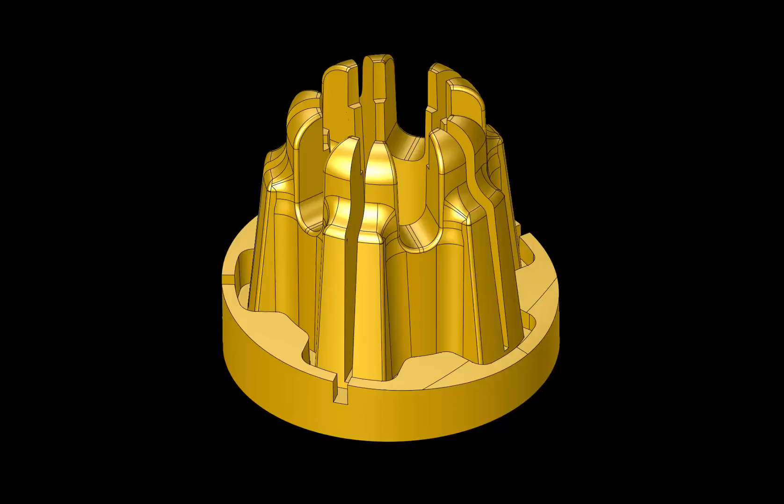The cooling process of a mold has a significant impact on its cycle time as well as on part warpage. Parts with complex shapes need curved cooling channels with constant distances from the edge for optimal cooling. Usually, these cannot be created using typical milling and drilling. Version 13 introduces a new function for designing conformal cooling inserts using 3D printing technology.

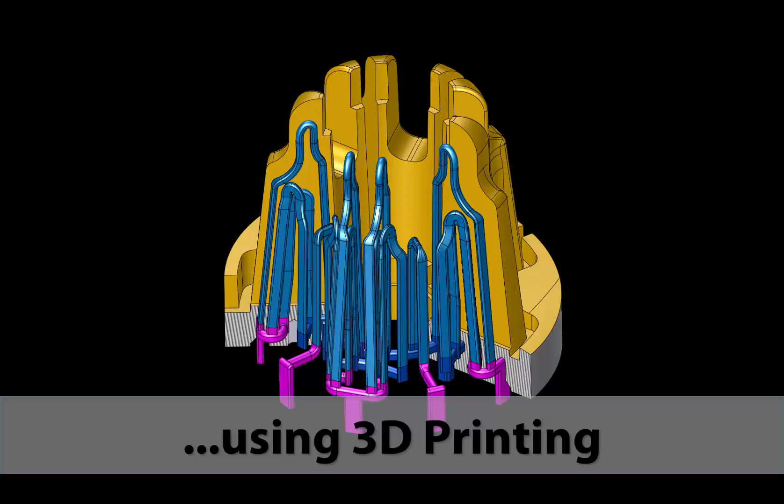The core insert of this part is already designed. We will now design the cooling channels of the orange segment. The orange segment is stiff and narrow, so first we will analyze it to determine the size of the cooling channels we want to use.

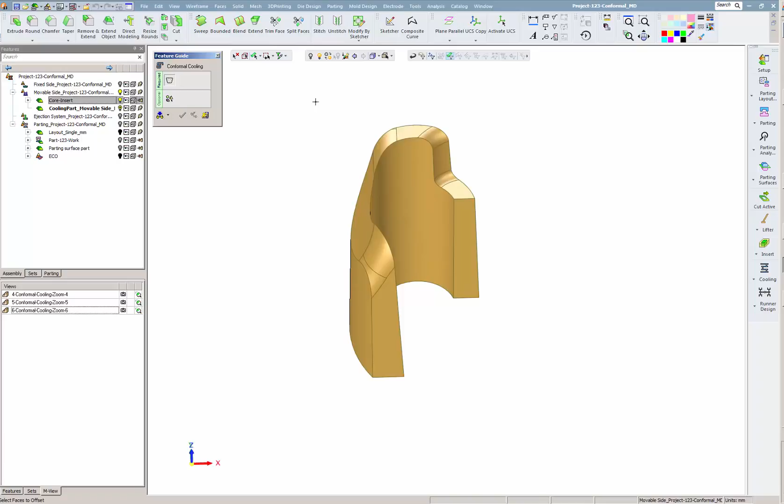Using the mesh offset option, we select the orange faces and define the cooling offset. The offset body is colored in yellow. We hide the core and try several values until we get the maximum possible value, 4 millimeters in this case. Next, we select the channel shape.

We start with a circular section with a diameter of 3 millimeters, which is more than the section of a 6 millimeter baffle. The section area is about 7 square millimeters. We then switch to ellipse with the same section area, as it has a greater cooling efficiency than a circle.

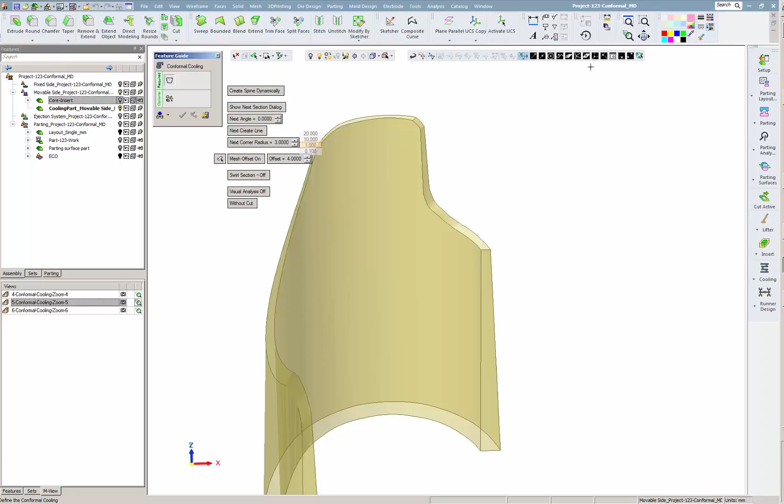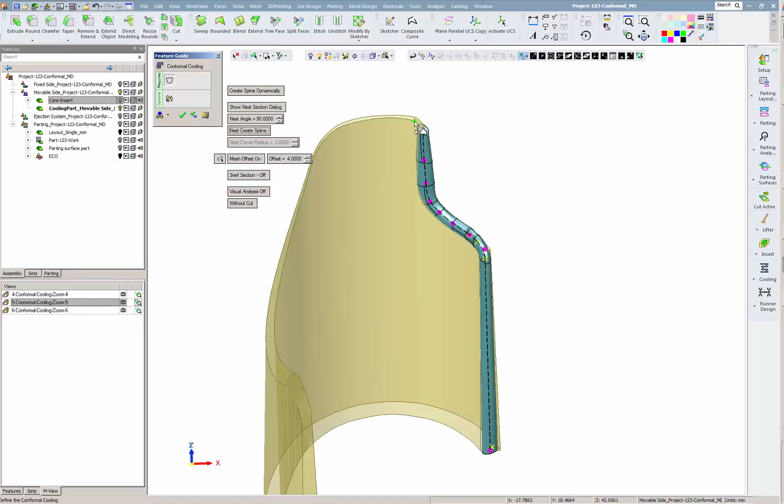We define the cooling segments as lines, the corner as 3 millimeters, and start defining the cooling channel locations. When we click on the next point, the system automatically rounds the channel by 3 millimeters. We now switch to spline segment type and continue the definition of the cooling channel. We change the rotation angle as needed until it looks right.

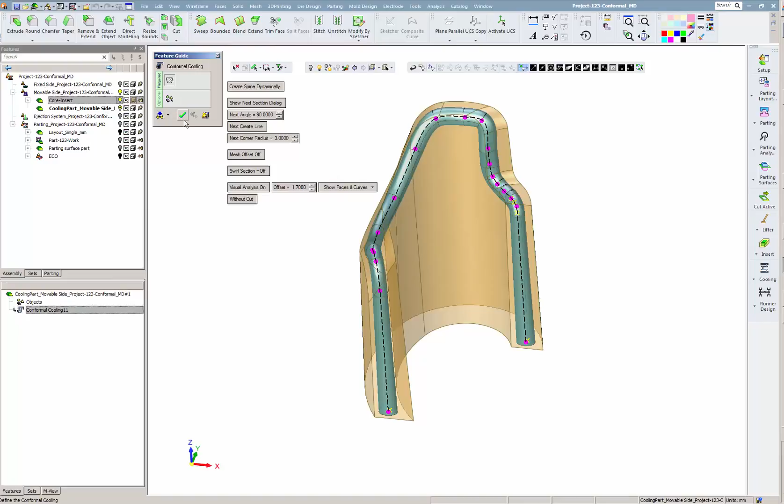At this stage, we use the visual analysis option to make sure we are not too close to the part. We start with an initial value of 2 millimeters. In some areas, marked in red, the cooling channel is too close. When we change the distance to 1.7, all the red marks disappear.

Version 13 answers a need for designing complex conformal cooling channels quickly and with complete confidence.